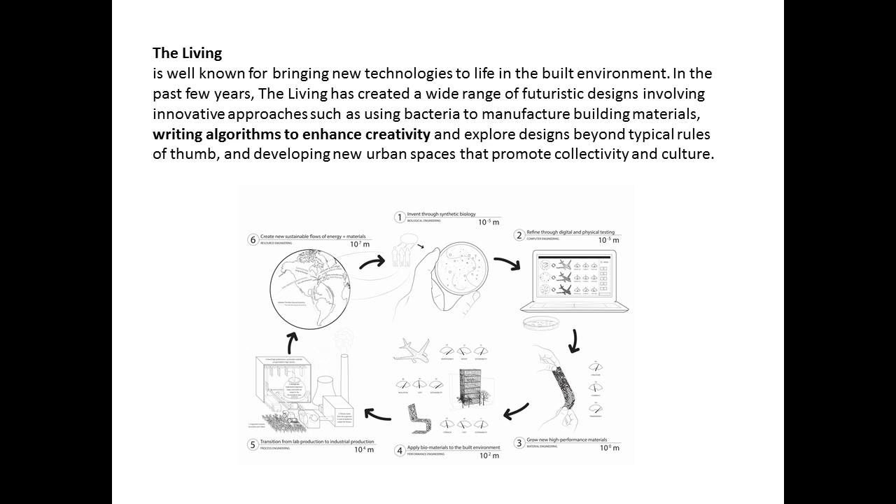In the past few years, The Living has created a wide range of futurist designs involving innovative approaches such as using bacteria to manufacture building materials, writing algorithms to enhance creativity, and exploring design beyond typical rules, and developing new urban spaces that promote collectivity and culture. One of the latest examples of The Living's approach was the PS1 courtyard.

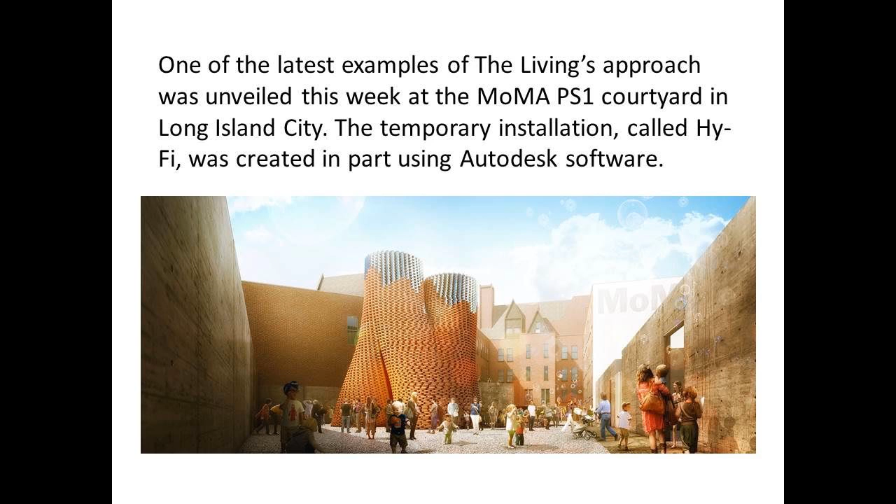The temporary installation was created in part using Autodesk software. He also said that this project tests any idea, high-tech or low-tech, new or ancient, and changes the way we design and manufacture the built environment for the better.

In the first place, he uses biological technologies to create the organic bricks. Low-value crop waste is harvested from farmers and chopped up, then combined with specially formulated mycelium, which is a mushroom root material - a natural self-assembling glue which can grow around and digest crop waste.

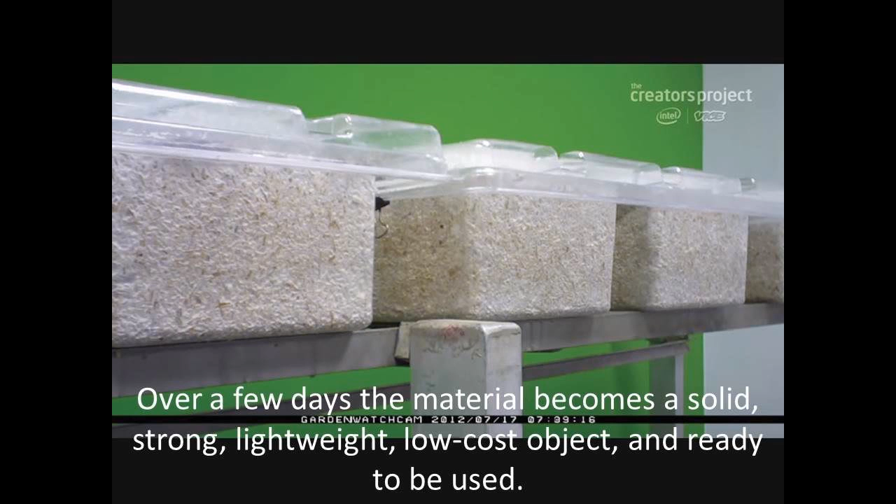This mixture can be packed into molds of any shape. Over a few days, the material becomes a solid, strong, lightweight, low-cost object and ready to be used. After that, the bricks are totally compostable. He said this building grows out of nothing but earth and returns to nothing but earth, with almost no waste, no energy needs, and no carbon emissions.

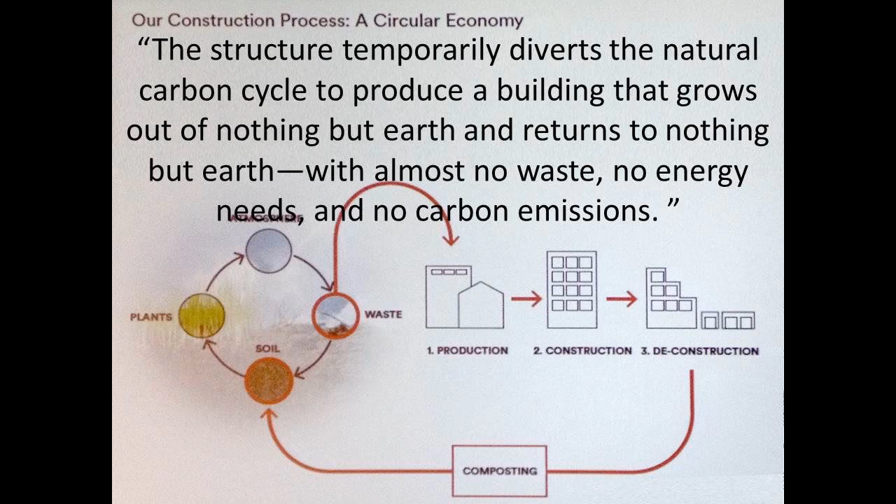In the second place, the reflective bricks at the top are produced through custom forming of a new daylighting mirror film. It bounces light down on the tower and the ground, and creates mesmerizing light effects on its interior walls.

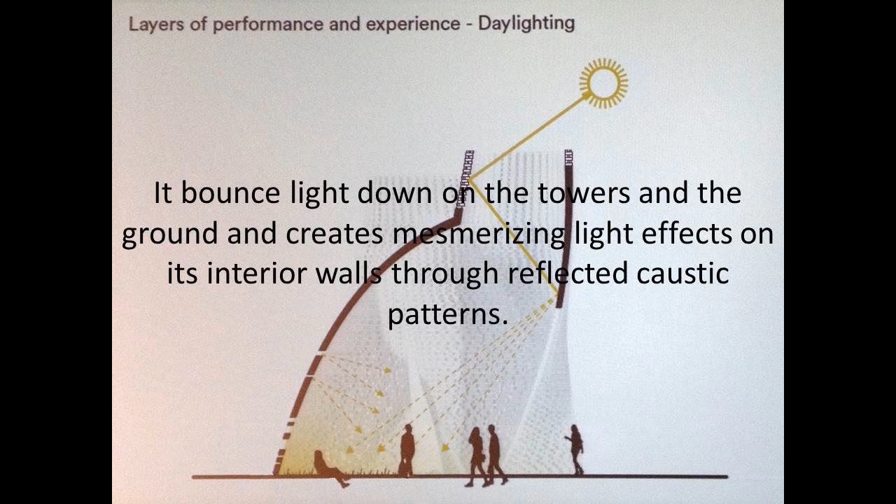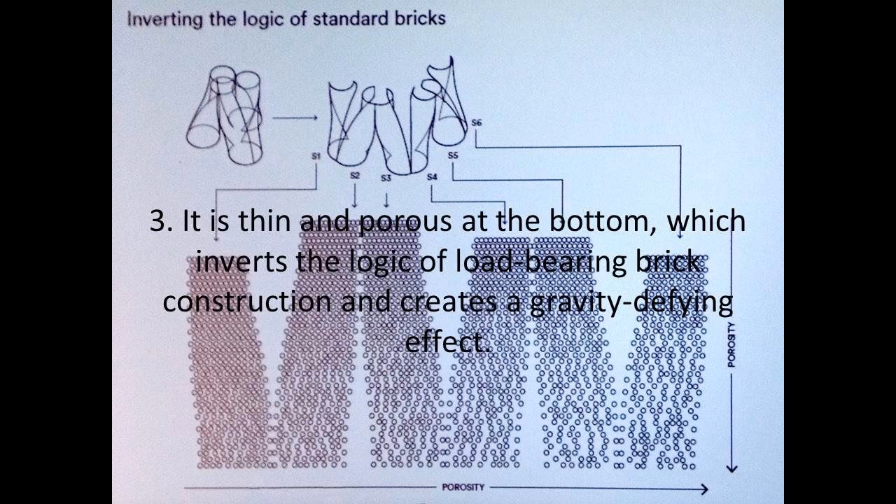In the third place, he uses a special structure that's thin and porous at the bottom, which inverts the logic of load-bearing brick construction and creates a gravity-defying effect. The structure is calibrated to create a cool microclimate in the summer by drawing in cool air at the bottom and pushing out hot air at the top.

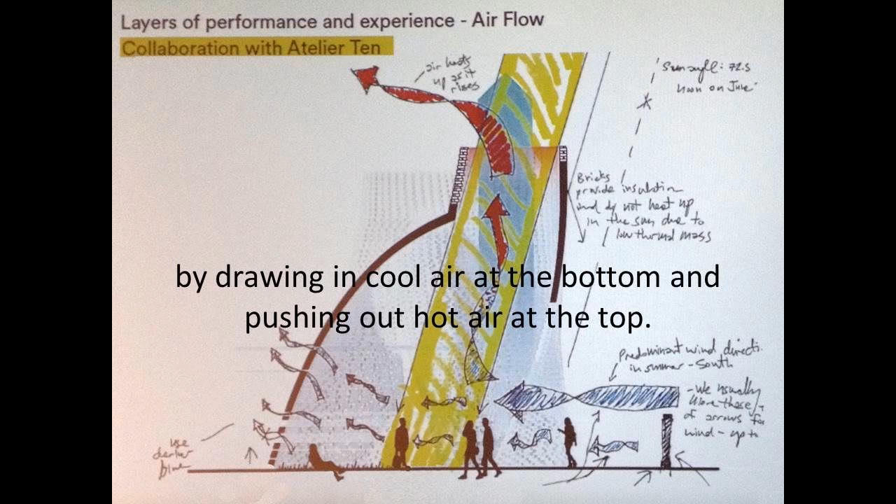Efficiently, it was even a new process in workflow and communication, says Benjamin. We would pass off some of the geometry of the process to the company that's manufacturing the bricks.

Then after the bricks are grown and tested, we'd get test results of crushing these bricks and send that data to the great architectural engineers at Arup, who analyze the structure and provide results which were then taken back into The Living's 3D model.

It's really an important loop for us to do many times in order to get all of the factors right to make a structure that's both new and experimental and testing something innovative, he explains, but also that's safe and able to withstand hurricane winds and the sun and the rain of New York City summers, and the wear and tear of people having giant parties in the courtyard of PS1 inside it.

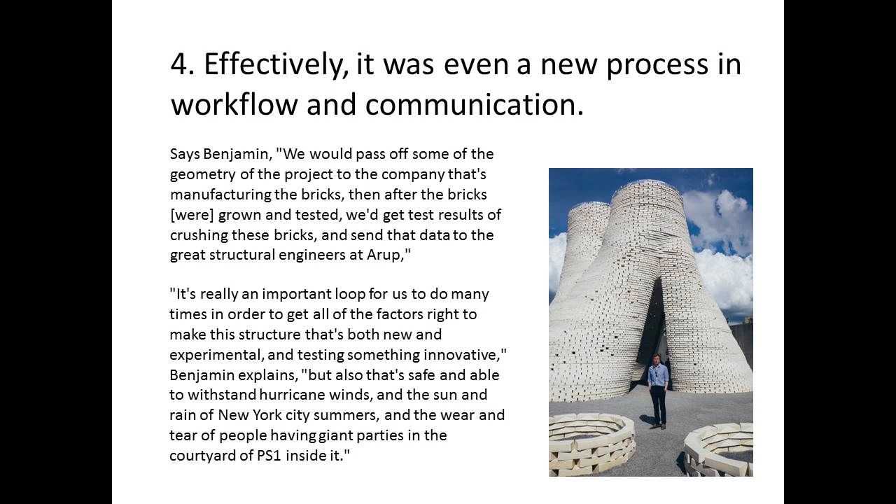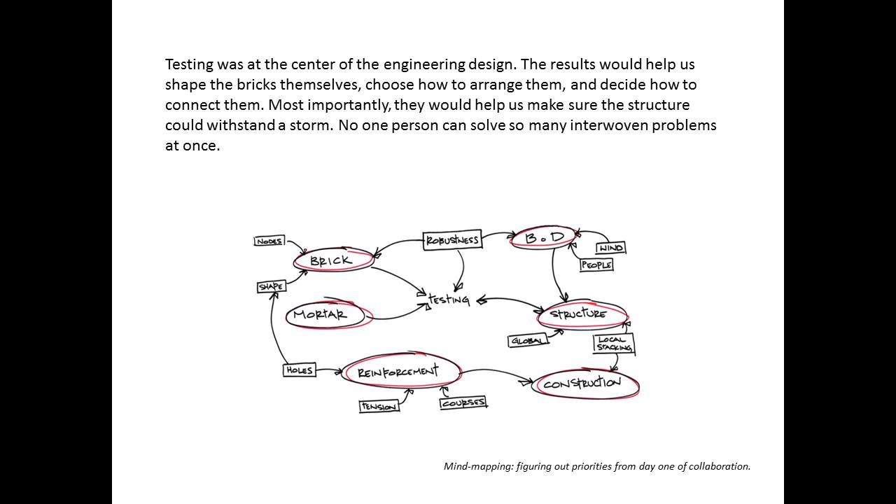Committed to going 40 feet tall, we had to start from first principles to figure out how to make it happen. Testing was at the center of engineering design. The results would help us shape the bricks themselves, choose how to arrange them, and decide how to connect them. Most importantly, they would help us make sure the structure would withstand a storm. No one person can solve so many interwoven problems at once.

Columbia University Laboratory provided scientific load tests. Burton at BMT Fluid Mechanics figured out what wind pressure the structure would see during the summer. Cook at Advanced Metal Coatings provided accelerated aging tests. Art Domantay Artworks helped us all think about how the tower would be built.

Ecovative kept experimenting, producing different brick types with varying density and strengths. Arup turned data into designs and provided confidence about their viability, all the while looking for opportunities and risks, and providing guidance about what testing should be done next. Leading the team and tying everything together, The Living masterfully crafted our structure out of all this information, drawing every brick along the way.

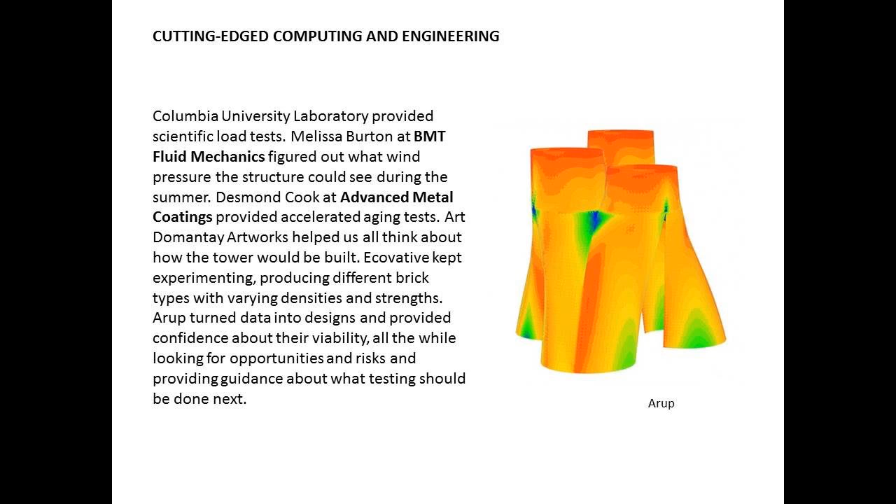I have a question. For the part of computing the social, he seems to contradict himself by saying that he had abandoned the fundamental economic tenet that people act logically. Instead, Pareto now believes that people are not logical, but believe they are logical. I think the opinion he held later seems more reasonable, for people have their own subjective ideas which can be critical for design making. Computing the social does not take emergencies and accidents into account.

That can be an important part of social behavior, and it is a fact that people do not behave the way someone designs. For instance, our design can be super good in terms of biological function and energy saving, but it is possible that people do not like it at all, maybe because they do not accept our high-tech building with its strange space to use, or they do not think the building has that much difference from others. So people just can't be as logical as other physical properties. Why do we still use logical ways or software to compute them?

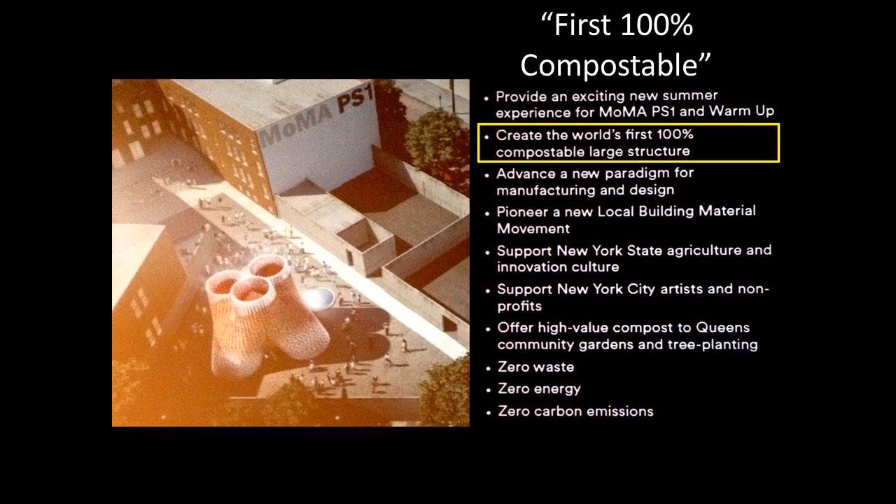In the first place, this project presents itself as creating the world's first 100% compostable large structure because of using these organic bricks, and the majority of comments and reports about this project only emphasize these points. At first glance, it has no difference from the old house of my grandmother, which is made of clay, weeds, and wood, and can also be seen as 100% compostable. And when searching for the material on the website of the company Ecovative, who helps them make the organic bricks, I found that the material was used in building before, but in an invisible way, as fill material inside the wall.

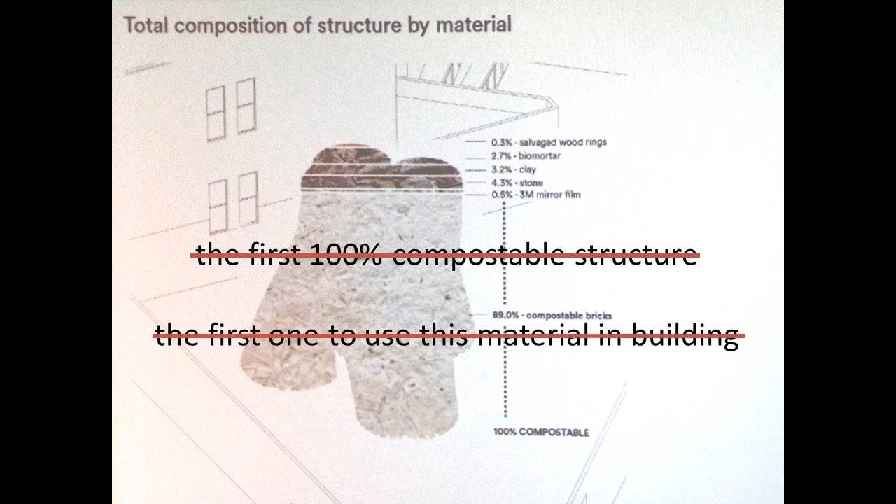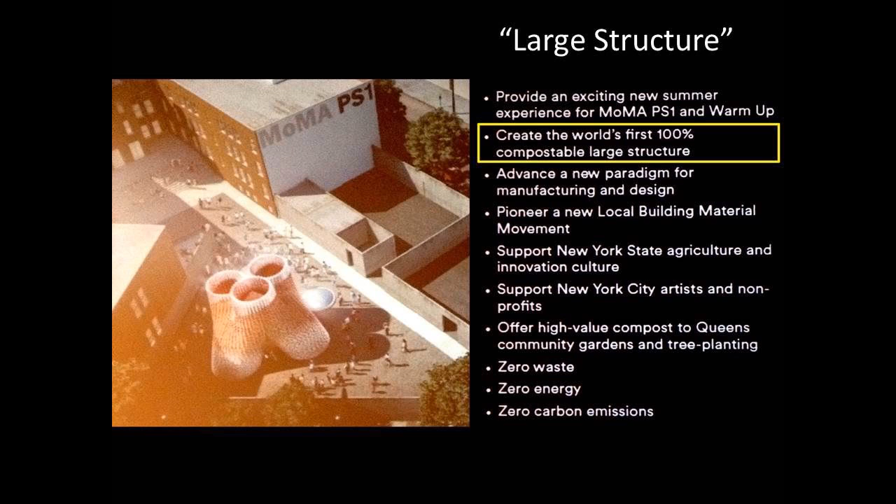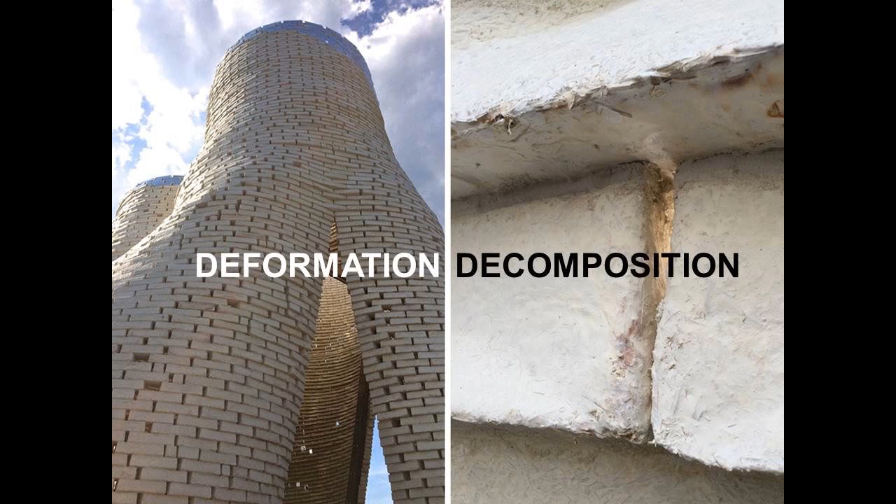So this project is neither the first 100% compostable structure, nor the first one to use this material in building. And in the second place, this project presents itself not as a building but as a large structure with no certain function and no requirements of interior space. So I think when it comes to a building, which is a more complex thing, it cannot still be 100% compostable. And when visiting this building, I do notice some deformation of the whole shape and decomposition of the material in some parts of the building. So in other words, using this material as main material in a more permanent building still needs to be tested.

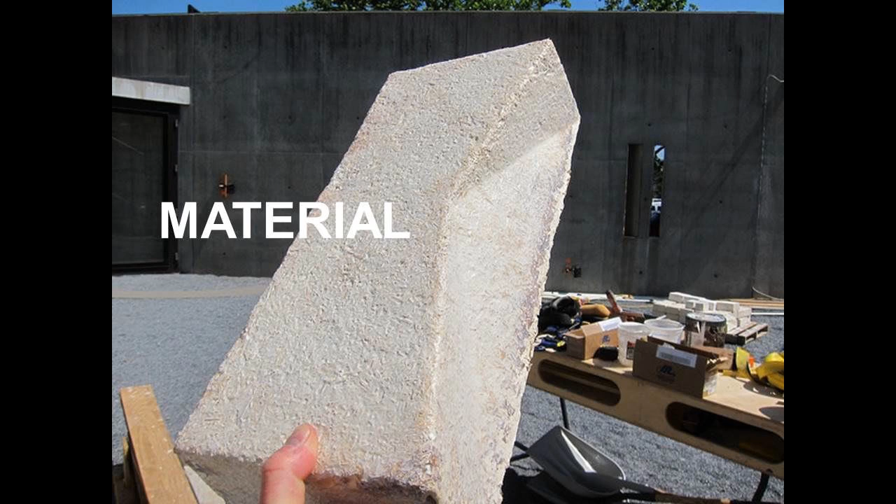So as far as I'm concerned, the value of this building lies in making this material and the process of producing these bricks visible to more people through their competition and their exhibition in MoMA PS1. Maybe in the future, more and more people will begin to use this eco-friendly material.

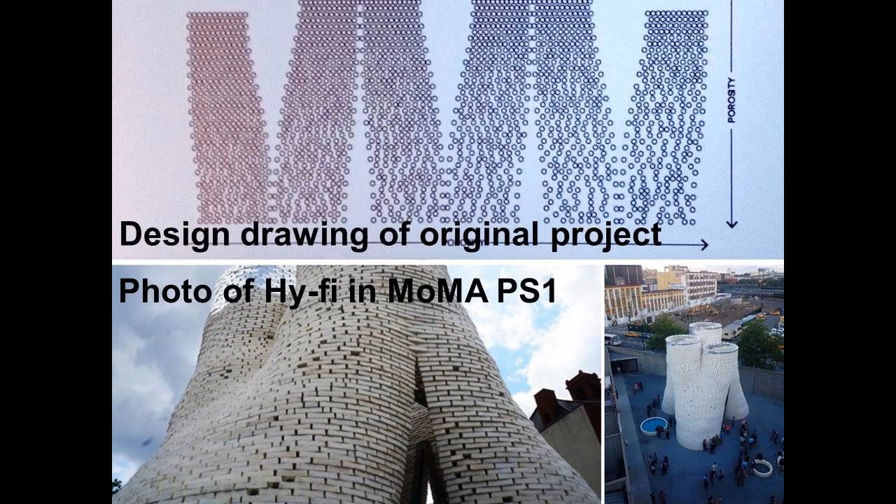I noticed that there are some discrepancies between the built project and what it was designed to be. For example, as shown in the picture, differing from their practice, there is no wooden or metallic beam in the design period of the project. Besides, unlike the design, the density of the bricks in practice is the same from top to bottom, which will minimize the gravity-defying as well as the cold microclimate effects created by the original structure.

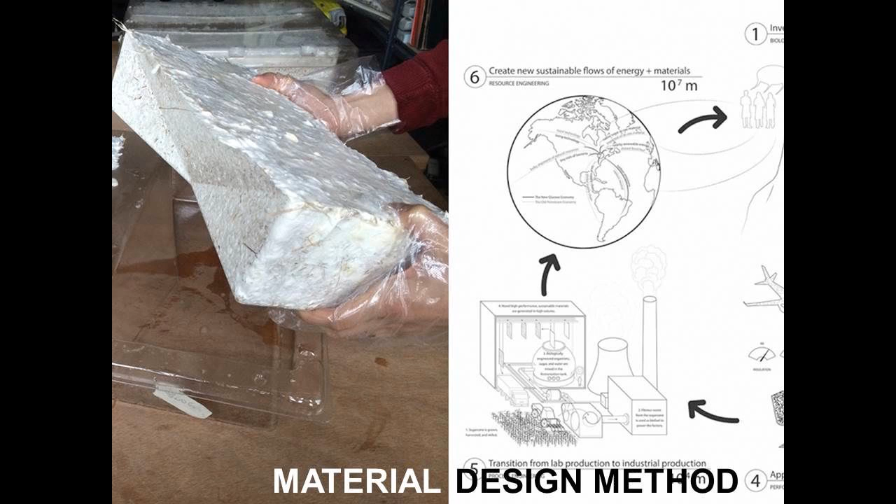He himself also admitted this in his lecture. Since he designed the structure and the array of the bricks by means of a computer program, I think these discrepancies reveal some drawbacks in both material and design methods when converting the design project into reality.